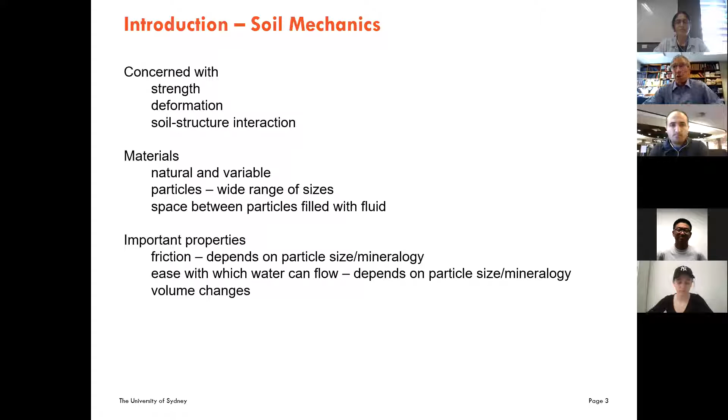What we're normally concerned with in soil mechanics is whether buildings sit on the ground, or we have tunnels in the ground, and we want to know whether they're going to stand up and be stable. Traditionally that was one of the big issues - the ground is definitely the weakest bit of the whole civil construction process. Then if we get a bit more sophisticated, we want to know how much the ground moves. If you put a building on the ground and different bits of it move by different amounts, that creates distress in the structure, so we need to understand and control that. And then there's a whole lot of other issues to do with the interaction of the soil - weak, soft material - with the structure, which is very stiff and strong. That sort of forms the basis of geotechnical engineering.

So that's kind of what soil mechanics is about, and the course, when you do it, is concerned with those issues. Now we need to understand what we're talking about with soil. The main issue is really the material - we need to be aware that we're dealing with a natural material. Soil has come from rocks that are broken down generally, and we have particles that vary significantly in size, and a variety of minerals. That creates a whole lot of uncertainty, and because it's a natural material, it's incredibly variable.

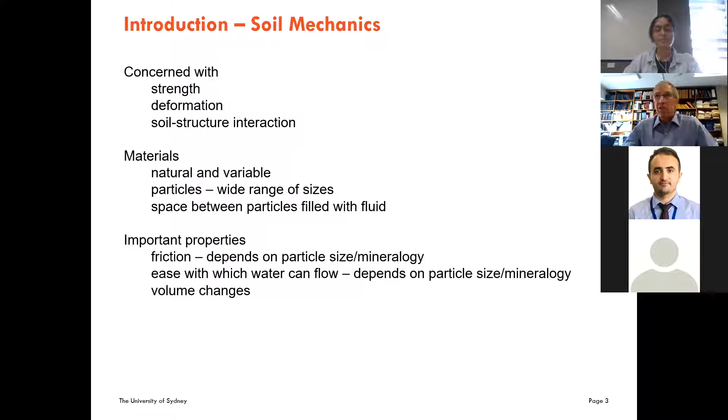Okay, so that's my brief intro to soil mechanics. Now let's have a think about the background to the issue with the ships.

Basically, ships have increased in size enormously in my lifetime. Prior to the 1960s, ships were pretty small relative to what you see today. Most of the bulk carriers, which is what we're concerned about here, were just coastal, generally going short distances, usually managing to avoid storms because they were only hopping along the coast somewhere. But nevertheless, small ships are actually the worst for getting rocked around in the sea, and a lot of ships were lost. If you think about over history, there's shipwrecks everywhere.

There was an issue, and increasing concern with the number of ships carrying bulk products, mostly coal at the time, that were sinking for unexplained reasons. That led in 1960 to what was a first - SOLAS, a conference which stands for Safety of Life at Sea. 1960 was the first time anyone really worried about it, which is extraordinary. It led to what's called the Proctor-Fageberg test being introduced in 1965, which is still what we're using today for looking at whether a cargo can be safely transported. It was initially just advisory, but since about 2008 or so, it's become mandatory. That's kind of part of the issue why I'm speaking to you about this today.

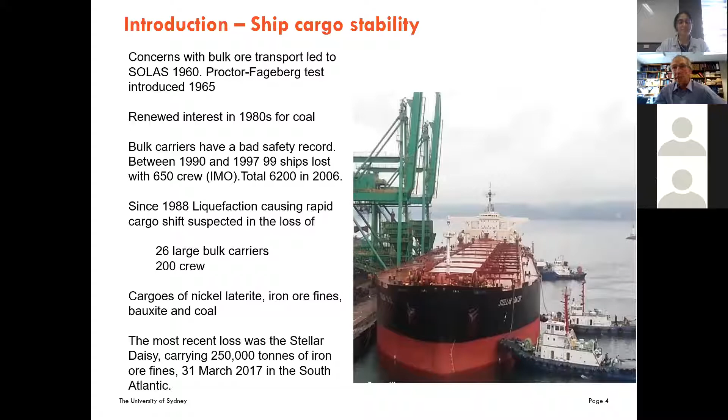So why did I get involved in this? What happened was in 2011-12, there were three fairly large bulk carriers, about 50,000 tons of iron ore, that sort of size, that sank in quick succession. They were almost all going from India to China. But the consequence was that the authority that looks after this, the International Maritime Organization, reclassified iron ore as a Class A cargo.

Now, the consequence of being a Class A cargo is that you have to check the moisture content. You have to do this Proctor-Fageberg test to make sure the cargo is safe to ship. The three main companies—if you look at the bottom, you'll see Australia and Brazil are the two main iron ore sources. Australia, the 44% from Australia at that time was just from two companies, Rio Tinto and BHP, and the Brazil bit is all from one company, Vale. So there's three big players here, and they're all suddenly being told they've got to do this test.

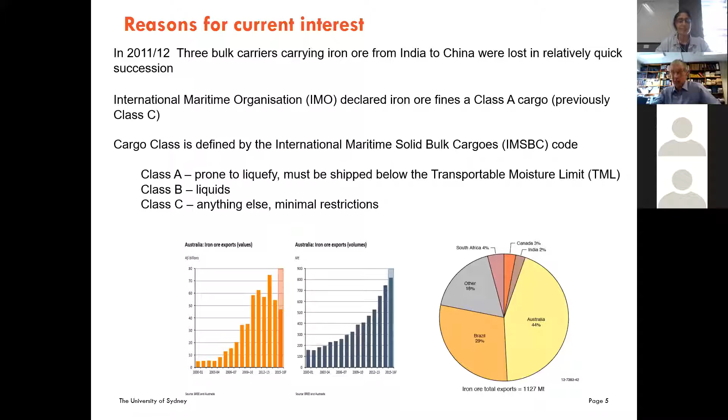Okay, so just to understand what's going on a little bit, I've got a picture there of iron ore fines at the port.

You mine this out as a rock. It gets milled up at the mine site, which involves water. It then goes into a train, comes to the port, and gets put in the stockpile. You can see they're spraying water on it to keep the dust down, which is a big issue with iron ore in particular. And then it gets shipped along a conveyor belt into the ship.

This picture in the middle is basically a robotic laboratory where they check the quality of the iron ore fines. So as it goes along the conveyor, at regular intervals they take samples and check the grading, the size of the particles, and the water content. This is all done by robots - there's no humans involved.

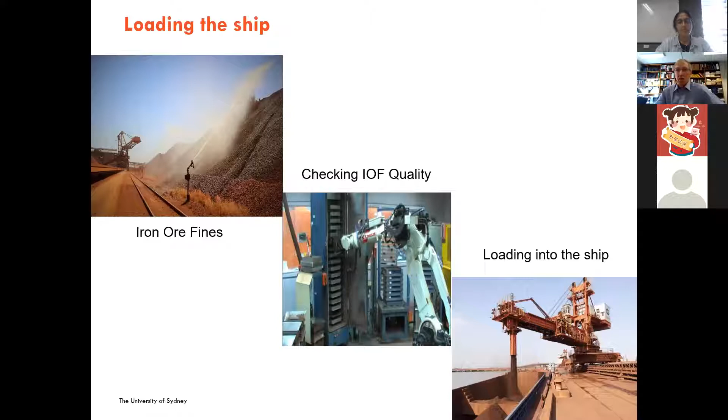And then it gets loaded into the ship. You can see the process there. It varies a little bit from place to place, but the three big players, it all essentially looks something like that. So that's what we're dealing with. And when it gets put into the ship, we're on the picture that looks like the top right here - we have what happens when the cargo becomes liquefied.

You can see that it shrinks apparently, and we now have water sitting on the surface. So how does that process happen is one of the challenges we've been trying to understand, trying to be able to predict exactly how that process happens. And this is actually a very difficult soil mechanics problem.

Bottom picture is a ship where the cargo did - and this is one that's well documented where this happened - the cargo became liquid, it shifted, and this ship, the Trans Summer, capsized, as you can see. So that's what we're trying to avoid.

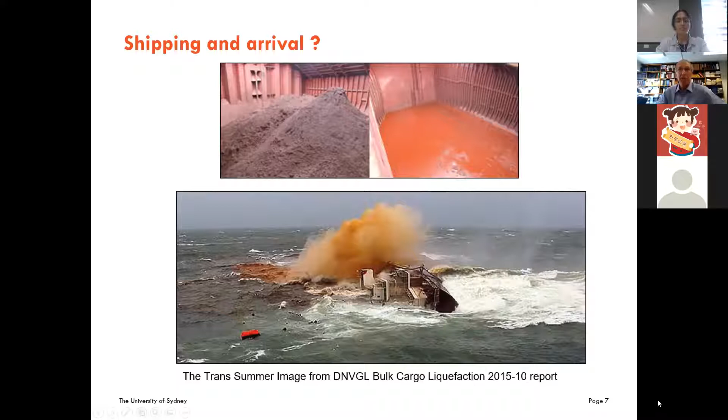Now, if you're shipping, the last thing you really want to be doing is transporting water, because if you're filling up your ship with water, then you can put less iron ore in it, and at the other end they don't want to receive water, they want to receive iron ore. So we're going to be concerned at the other end when there's lots of water, but generally there isn't much water - there's lots of air. However, the problem only occurs when we have lots of water.

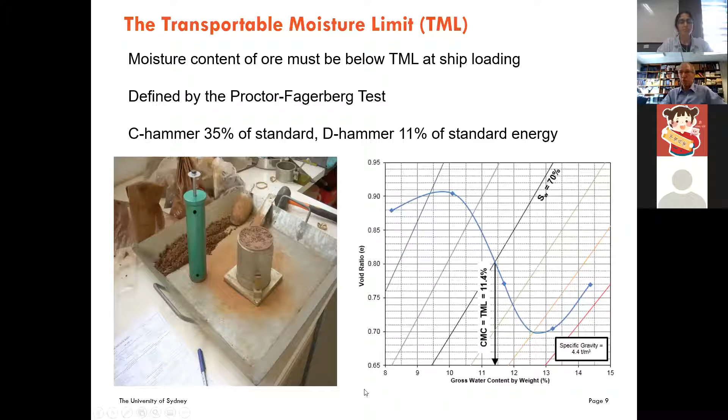The idea is this curve is not unique, okay? This is the problem. The curve depends on the density produced by the shipping, and this is one of the issues with this process. You have to know what size hammer to use to represent the situation on the ship. So it's not a very rigorous procedure, but this is the procedure which is used.

So just so we understand why research is being done, the TML was introduced. The iron ore producers were very worried about this. They wanted the value to be as high as possible because they were concerned that they would come and load up their ships and then find that they weren't allowed to.

And indeed, this actually has happened in Australia. When that happens, they have to dig it out of the ship, which is a big issue for them because the ports are not designed for digging cargo out of the ship. They're designed for filling them up. So when that happens, it takes them about a week to empty the hold.

All the ships are backing up. As you've heard with the Evergreen thing in the Suez Canal, when ships start backing up, the costs of the delays to all the other ships start to very rapidly add up to tens, millions, hundreds of millions of dollars. So this is a big issue for the shippers.

Of course, if you're an owner of a ship, the insurer, or the crew, you're very interested in the TML because you want to get to the other end safely.

The test itself, as you've seen, is a very simple test, but how uniform is your product? How often do you do tests? It depends on the user.

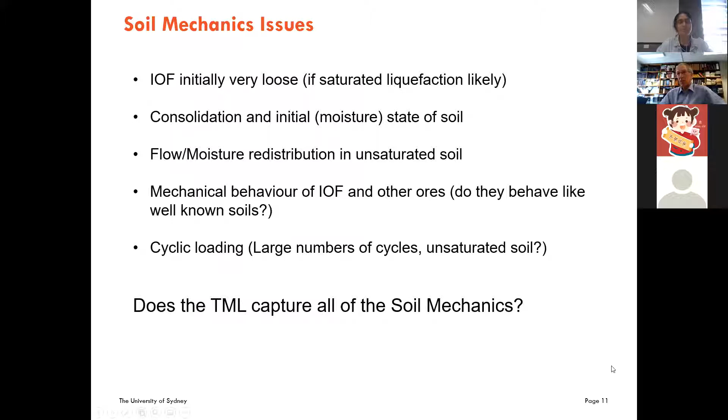And then we're applying cyclic loading, which is a problem to get good predictions. And then it's also unsaturated, which is again another issue where we don't really have a good understanding of the behavior, particularly joining unsaturated and cyclic together. So there's a whole lot of uncertainties in the soil mechanics. And does the TML, this simple moisture content test, capture all of that? And can we say that it's safe? Okay, so this is really the fundamental research question that we're trying to answer.

Okay, so what did we know? We knew there's work done in the 1980s on coal. Interestingly, I was sharing the apparatus with someone who did a lot of the key work when I was doing my PhD. There were some tests done again back in the 80s with centrifuge. I'll show you a picture of centrifuge in a minute. This is a modeling procedure, and basically it suggested that water flowed to the base and then it could liquefy. But that really hasn't flowed on into any change to the shipping process.

Another issue that we faced when we started looking into this problem was that we had no data. There's no data on what was happening in the hold of the ship. Partly because the iron ore companies said, well, we have no issues, so why should we take any measurements? But also, when confronted with a problem, we said, well, the normal thing is to take measurements. And we were told, no, there is no way you can take measurements. So one of the issues was we couldn't put any instruments into the ore because there was a big penalty on the shipping company if there were things that shouldn't be there when it arrived at the other end. So they weren't keen to put anything into the ore for that reason.

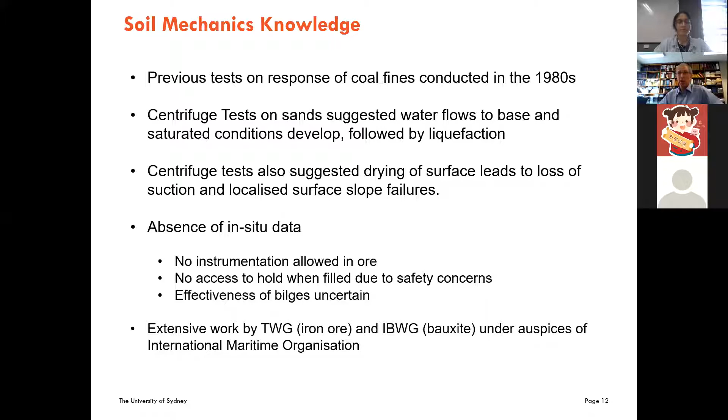There was a belief that the size of bilges were still the same as when ships were 1/10 the size that they are today. They're not sufficient, and then they cover them up because when you get the iron ore into the bilges, it's a real mess. So basically, although they have a bilge, which would definitely help their problem, they're not effective in practice. And a lot of work was done at the same time as we were doing our tests to look into these problems by the technical working group of the IMO and bauxite working group, which were really the mining companies basically looking after their own interests. They sponsored this research so that they could work out how they could safely ship their product.

Oh, sorry, we've gone on way too far there. I was pushing end. Sorry, got to go back. Sorry, I'm going to have to.

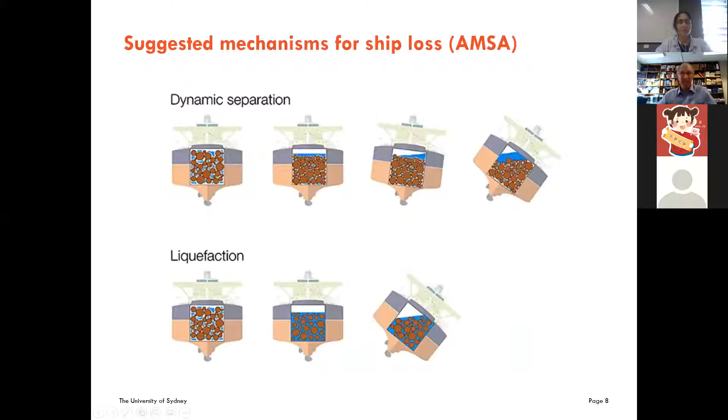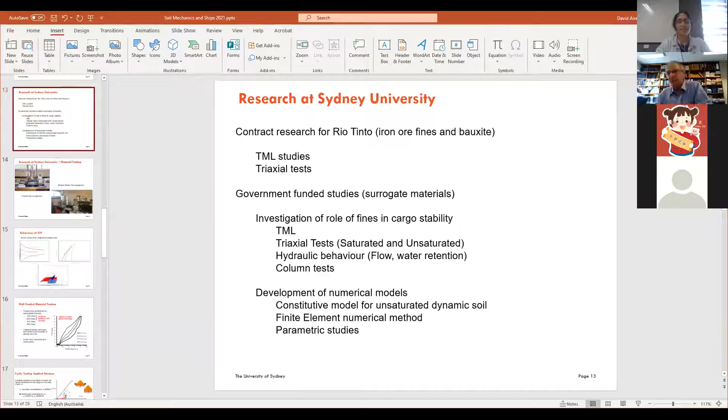Okay, so I'm going to go fairly quickly now through what we've actually done, because this is where it gets a bit technical. I was employed by Rio Tinto. We did a lot of work looking at TML. We actually dropped ore 10 meters off the side of the electrical engineering building to look at what happens when you load it into the ship. We did a whole lot of triaxial tests, but I can't talk about the results because that's all confidential. But what happened at the end of that is we went on to do some further study funded by the government to look more fundamentally at the soil mechanics issues.

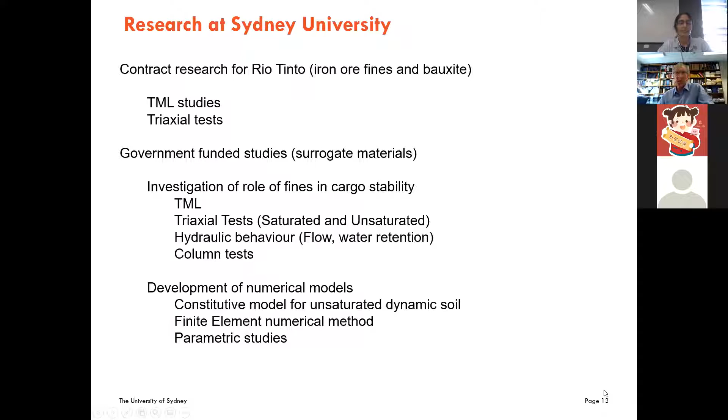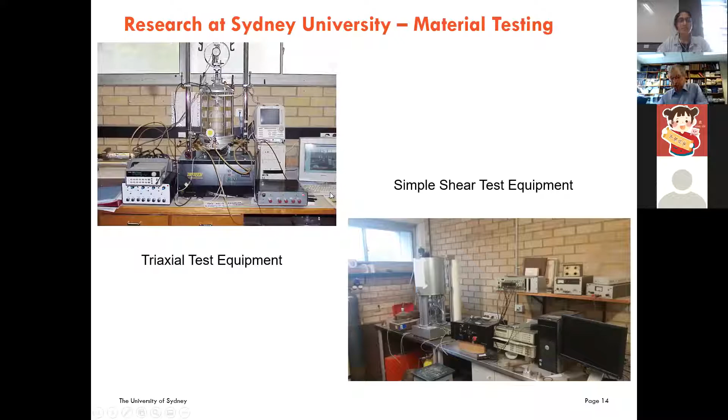So it's not about whether iron ore can be shipped safely, but if the product changes over time, what are the key factors in terms of the material that influence whether we've got a problem? So there's a whole range of things that we did there, which I'll talk about very briefly. We did a lot of tests in the lab. We have this equipment, triaxial and simple shear tests. They're fairly sophisticated, computer-controlled equipment to look at the soil behavior, or here the iron ore behavior.

Oh, sorry, I pushed the wrong button again.

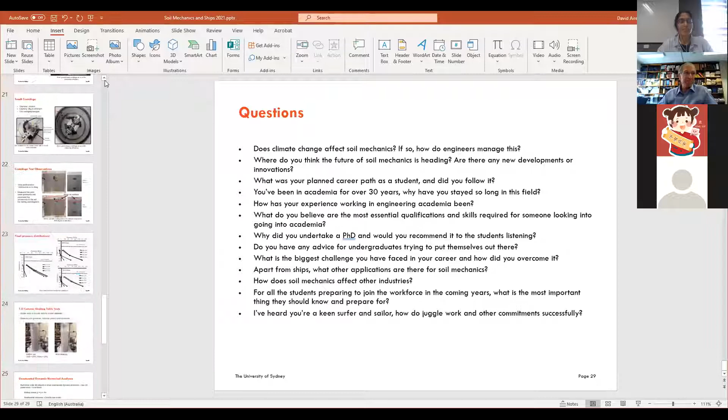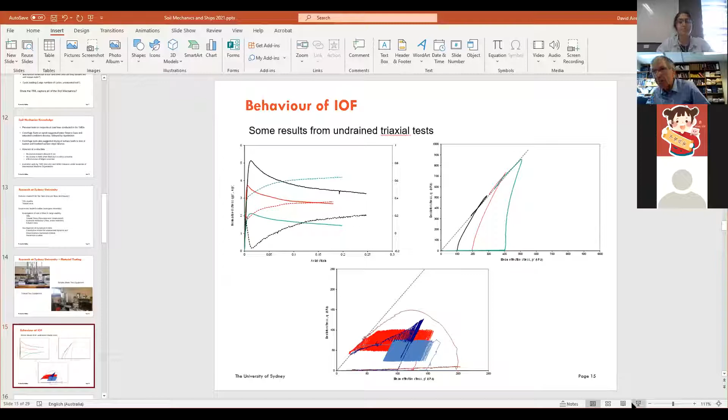So you don't need to worry about the shapes of these graphs, but this is the sort of thing that you get. The point I want to make here is that soil is tricky. This is the result of one of those triaxial tests, or actually 3 tests, but if we just look at the black line, the resistance goes up to a peak and then drops off, and we're interested in strains here of up to say 5%. And then the dashed line, which goes with that, is what's happening with the water pressure. So the water pressure goes up, it goes down, and then it comes back up again.

So when we're trying to come up with a model for the behavior, which we need to be able to predict what's going on, what you can hopefully see from this is that the soil response is very tricky. The model we're going to end up with is not like steel, where you've just got a straight line between stress and strain. Here, this is a highly complex, non-linear stress-strain behavior that we're trying to model. And then we've got cyclic behavior.

So these are the results from cyclic tests down at the bottom. The key thing is that we start down here on the right, and then as you cycle it, you move across to the left. What happens there is the water pressure is going up. As the water pressure goes up, the stability of the cargo goes down. The dashed line represents the failure. So when we come to this line, it fails, although this dark blue one actually failed here when it hit the monotonic curve. You don't need to worry about the details. The point I'm trying to make is soil behavior is tricky. It's tricky when it's static. When it's cyclic, it's doubly tricky.

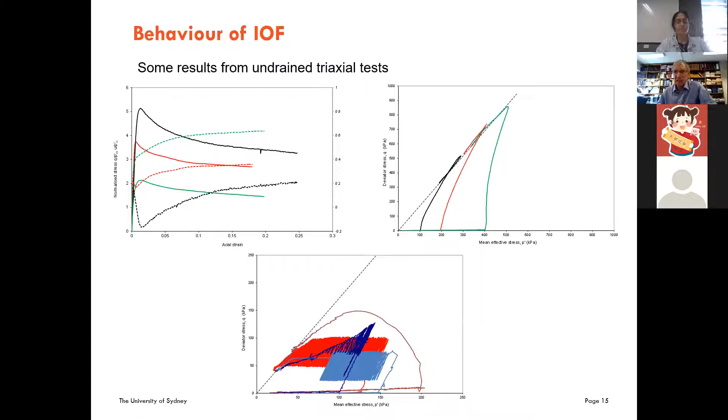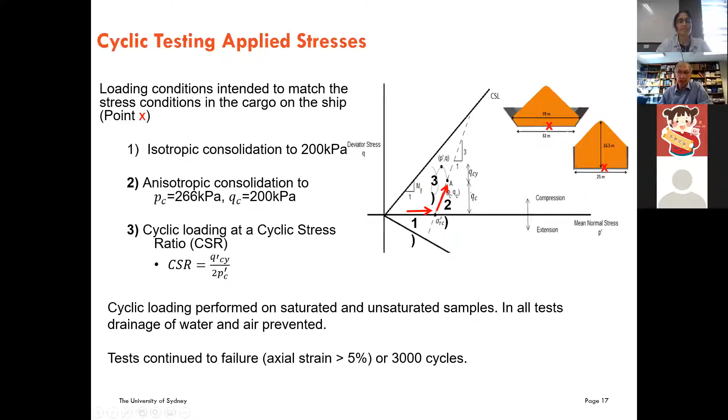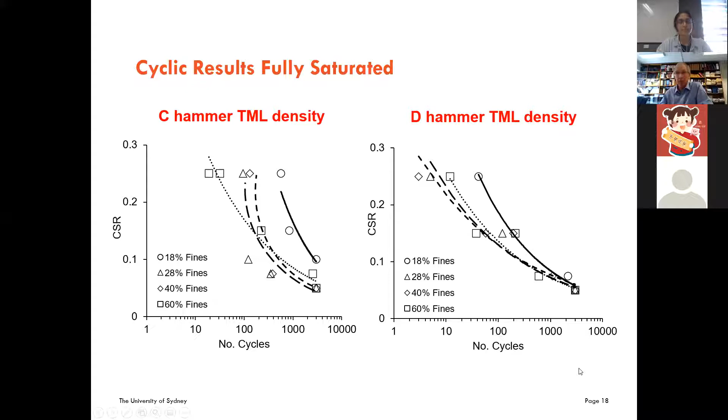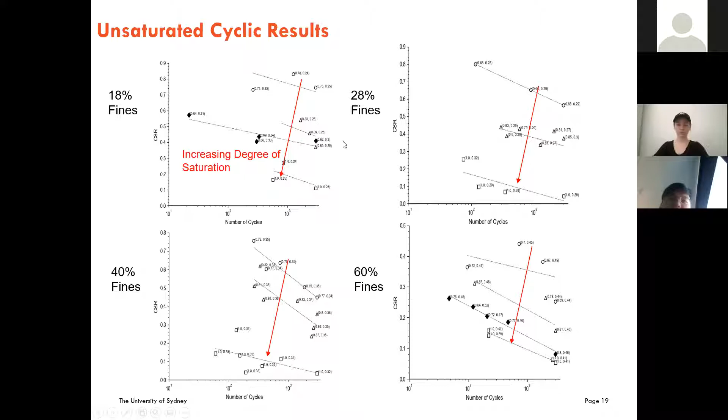Then when you do it unsaturated, the curves shift up here. That means that you get many more cycles before failure occurs. So this is saying that the TML is good, right? As we reduce the degree of saturation of the material, it gets safer and safer. And you can see you don't need to reduce it much to get a very significant increase in the number of cycles to failure.

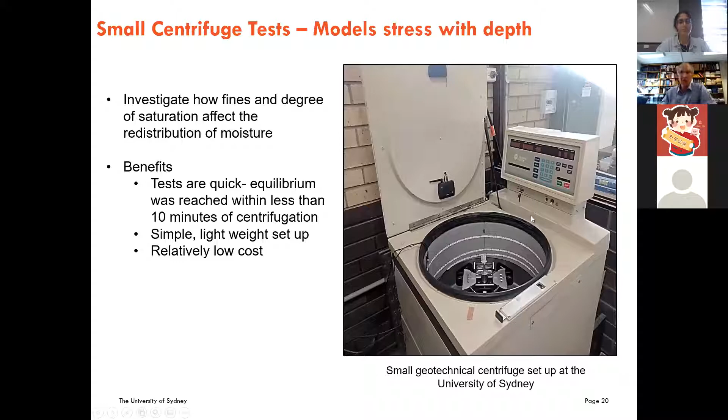So centrifuge, I said I'd talk about that. We did some centrifuge tests. This is what it looks like. It's just a big washing machine. Looking down on the top, we're putting the soil into these little containers in here. The whole thing then gets spun around.

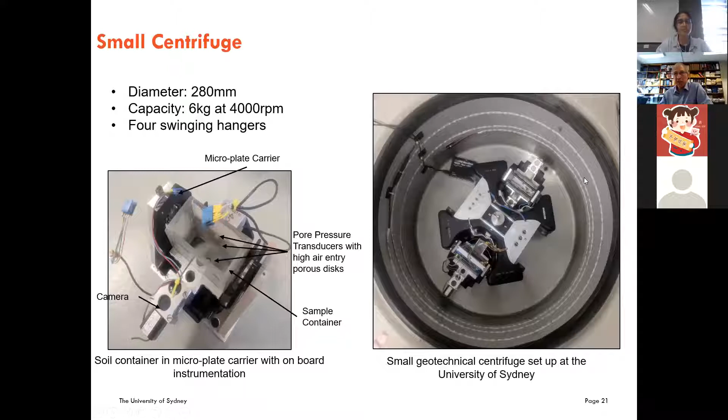Yeah, so what we did, we spin this up to 1,300 revs per minute, which represents 264 times Earth gravity. And the idea is that when we do that, our 50 millimeter or so height of sample here represents the 15 meters that you have in the ship hull. Okay, so it's a scaling issue.

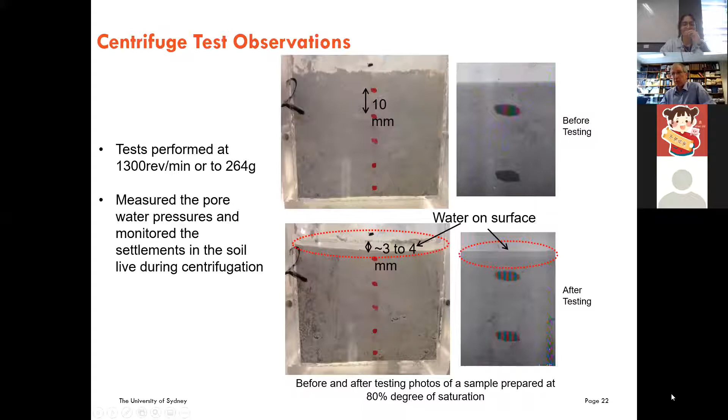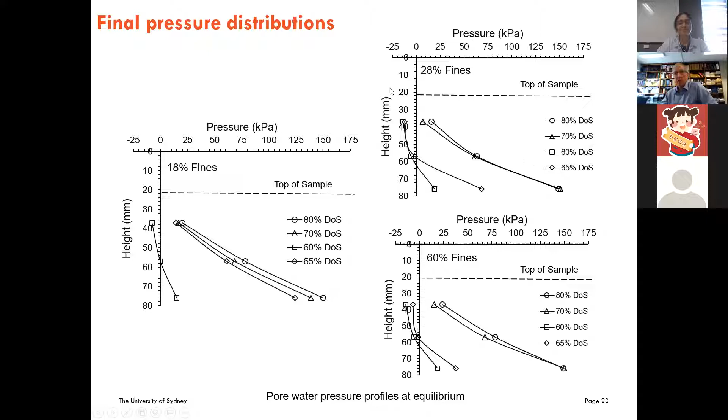Okay, and then the soil settles, water comes up to the surface, and what we see here, and I know I'm running out of time, is that when you start off with a soil with quite a lot of water in it, so 70% degree of saturation, just from that stress, you end up with most of the material becoming saturated. Okay, so although you think you've got lots of safety because it's unsaturated, in fact, this process of loading the cargo into the ship ends up with a very high degree of saturation, particularly at the base.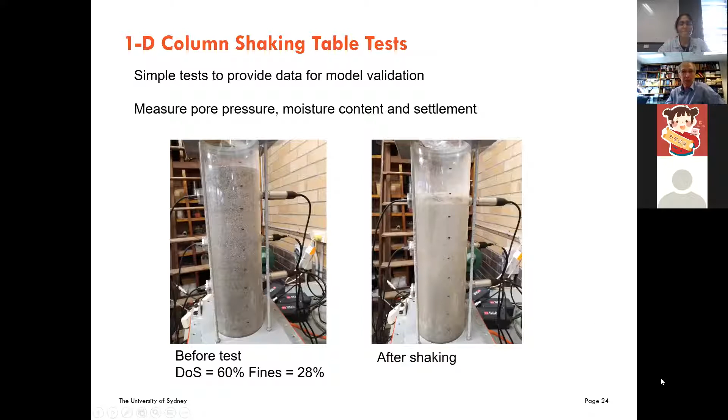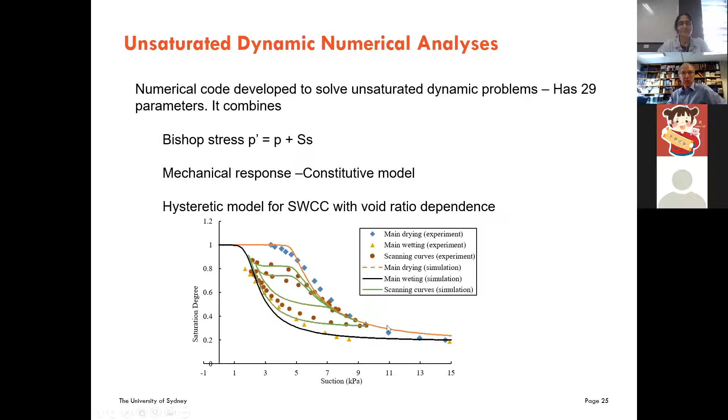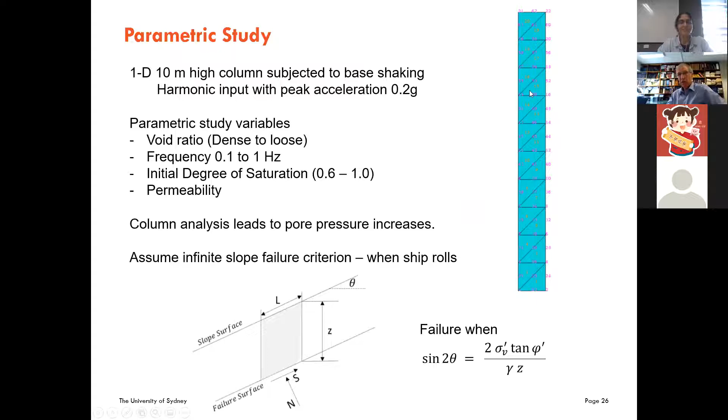Okay, and then we try to model this numerically. So just very briefly, we've got lots of parameters to model the behavior. We've got unsaturated behavior with the water, which also creates extra issues. We then put that into a finite element analysis where we're solving the equations in lots of little bits to try to deal with the nonlinearity.

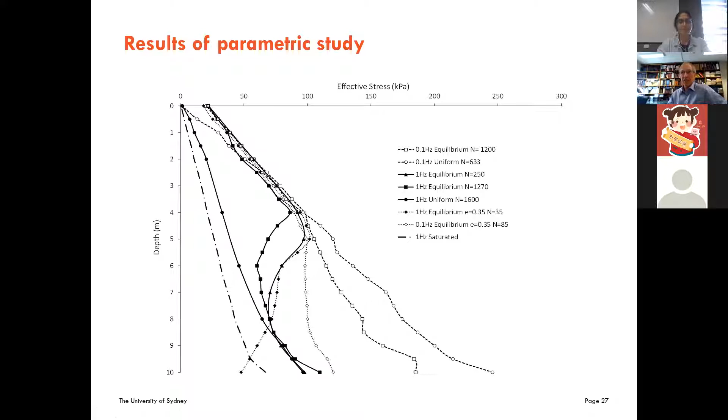Okay, so here's the one with 80% degree of saturation. And this one suggests that it will be safe with about 20 degrees heel. Okay, so I'm skipping a lot of the details there because we need to finish.

Okay, so we've been trying to work out whether it's safe to ship the cargo. This required us to understand a lot about soil behavior, unsaturated soil with cyclic loading. There's still a lot of work to do. Our results certainly suggest that it's probably okay, but we certainly can't conclude that for now.